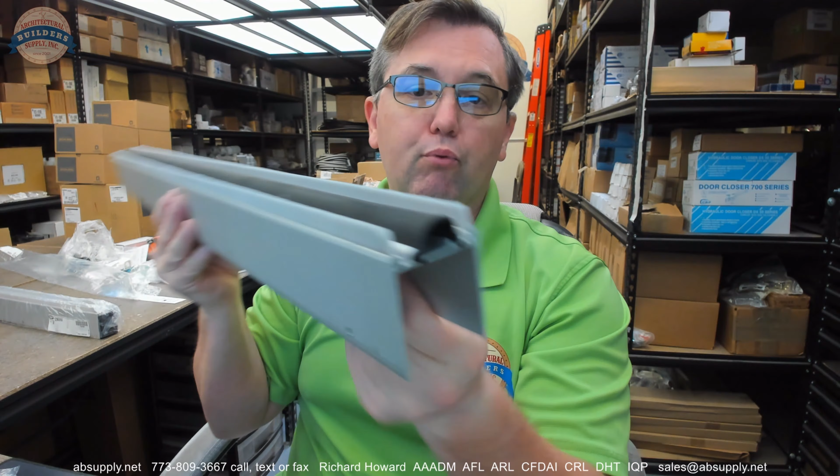This is the 92NWHA, which is going to feature those long sides, but also this somewhat belt and suspenders approach when it comes to sealing the bottom of the door. You're going to have two rows of nylon brush insert. Then you're going to have a piece of neoprene synthetic rubber on the inside. Now, each of these inserts will perform a different role in what they're intended to help mitigate.

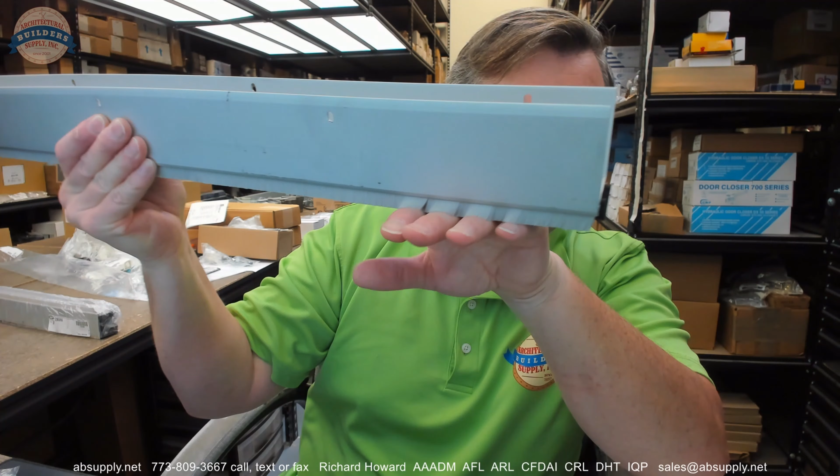So what I mean is, brush is very nice because it absolutely will give you a low closing force when it comes to the door closer, or the closing device if there is one. That's one. Number two, if my fingers were to represent an irregular floor surface, it does a phenomenal job at sealing over an irregular floor surface where that neoprene insert, if I put my fingers there, there's going to be gaps and spaces. Well, you bring your nylon brush, it fills that in really nicely.

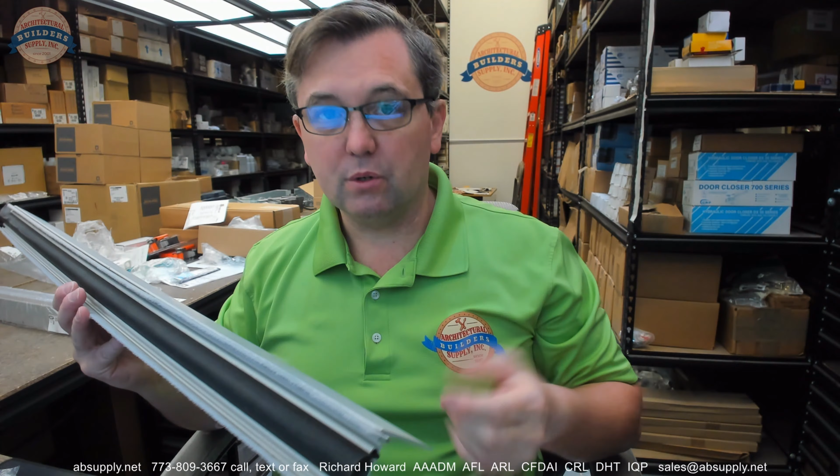So that's number two. Number three, insects, it's known, don't like to land on bristle at all, so it's very effective. Now, maybe less of a thought when it comes to a door bottom, but the concept certainly pertains to astragals and other weather stripping. So it's good in all three of those instances.

Now, this neoprene that's down here, I imagine that this is closed cell neoprene. They call it black neoprene. It doesn't smell like car tire, but it's not the sponge type either, so this would be very effective at sealing for water. Closed cell neoprene is exceptional for that, where it's non-sponge like, really great for water intrusion.

Sponge type neoprene would be very good for thermal, to retard the transmission of thermal energy along with acoustical energy. So this is really a belt and suspenders approach to sealing the door quite effectively. And I'll tell you another reason why people buy these door bottoms with longer, taller sides: they have some damage at the bottom of the door.

Or they're trying to encapsulate a door that's beginning to fatigue, a steel door that's starting to rust, or a wood door that's just starting to really flare out at the bottom because it will be getting time to replace it. I've had people that have mitigated the problem at the bottom of the door: clean it up, sand it evenly, reseal it, maybe try to glue it and clamp it down, put wax paper on top of whatever you're using to have your clamps make contact to, and then to the door.

The wax paper prevents, let's say you're using a piece of 2x4 to clamp down the door to be able to bring it back together a bit. The wax paper will keep the glue, which will seep out and through, from grabbing that 2x4, and then when you unclamp it, you pull the 2x4 off, and now you're taking some of the door with you. So wax paper is a great option. We used to buy it 10 rolls at a time.

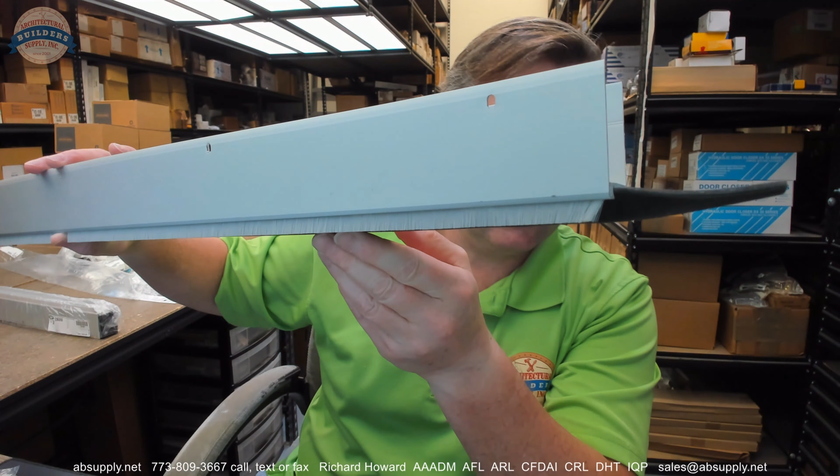Now, this is the A finish, which is a clear anodized aluminum. It's going to be also available in the dark bronze, and it's typical that the neoprene will run long. I just have it basically flush over here for purposes of this video, and you're going to want to get that installed, and then you'll trim it accordingly.

Now you'll see that bristle that's here, I can tug on that a little bit, that's nylon bristle with a steel banding or steel holder. So there's four materials in here: aluminum, steel, neoprene, and nylon.

When you're cutting this, assuming you probably have to cut it, be mindful that there's some steel there. You can cut everything else with a miter box saw, no problem. Your nice 80-tooth, 8-inch diameter miter box saw. You don't want to run that through those little pieces of steel. You want to tug those out and cut them with an end cutter.

And they may be somewhat difficult to slide out, and that's because the factory intentionally crimps the side of these because you don't want the bristle to move. I would think that they should put instructions. The bristle is going to slide out. You do need to crimp that a little bit. I've had people call me and say, hey, that's dented or that's damaged. It's not. They actually peen that down or crimp it to prevent that movement.

And I would recommend that you do that. You get in there and just crimp over the one side of that ever so slightly so that you could reverse it if you ever needed to replace the inserts, which would be possible from the factory.

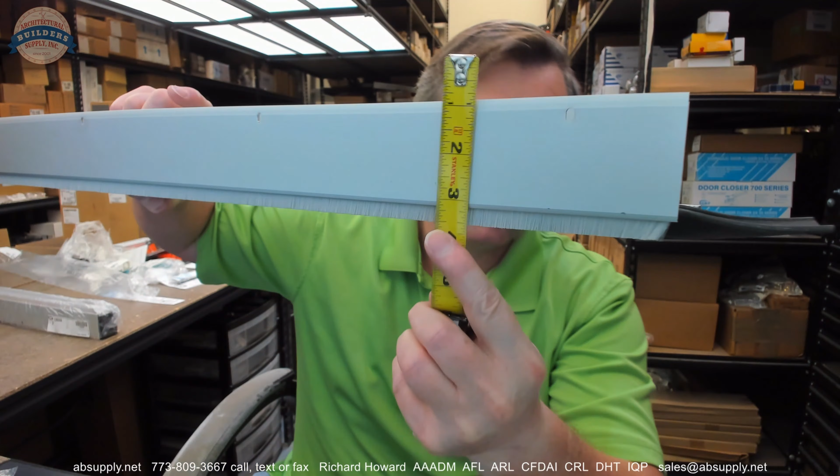Now, some dimensions. There is an image down below that shows the dimensional properties of the item. And it's every bit of a 1/2 inch or 3/4 inch taller than standard in terms of the face. That face is 2 inch. What they're really saying here, the dimension is 2 inch from where the bottom of the door will reside. That's the 2 inch part. So the overall face that you're going to see is going to be beyond that, about 2 1/4, as you can tell. Down to the bottom of the insert is going to be about 2 1/2, 2 5/8.

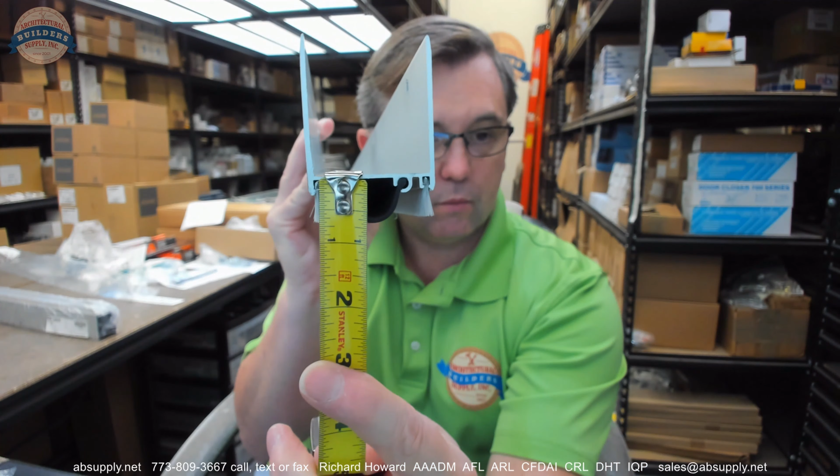Okay, so the important part is from the bottom of the door to the bottom of the neoprene. Looks like it's just heavy on 5/8. Sorry. Yeah, 11/16. So, what should your undercut be? No tighter than 5/8, I would think. Any tighter than that, the neoprene's really going to start to crimple, if that's a word, fold over unnaturally. The bristle will tolerate that a little bit better, but you don't want to have a substantial amount of resistance to the door closing. Let's say you had an undercut of 3/4 inch.

Okay, maybe just tug this down a little bit. And you'll notice these screws are here at a stagger pattern, and that's, of course, normal. You don't want the screws, which are included, to bump into each other. They've included self-drilling screws with this. I can't say that that's standard across the board, and I would guess that it is not, but that's what the factory put in with this unit. So there you go. There is some supporting documentation down below, so let's switch to that right now and take a look.

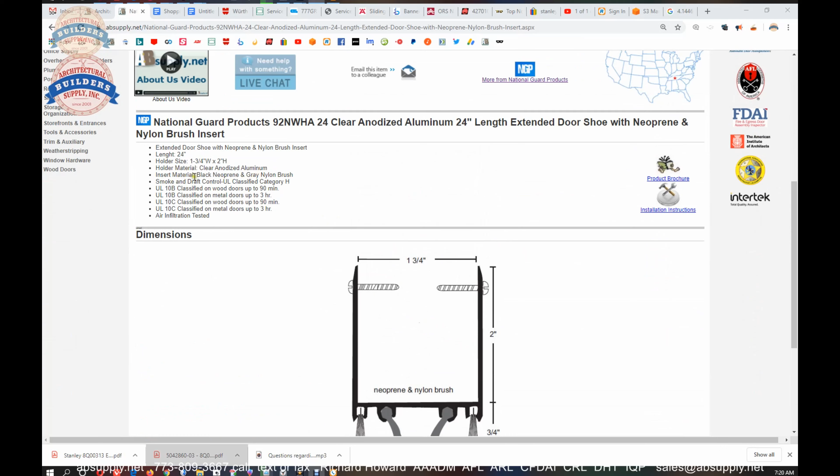Okay, so this is the item that we're looking at here. Dimensional properties, nylon, neoprene and nylon brush. Fire rated up to 3 hour. Black neoprene and gray brush. Smoke and draft control. Okay, product brochure is here. This is where you'll see a smattering of different extended length door bottoms.

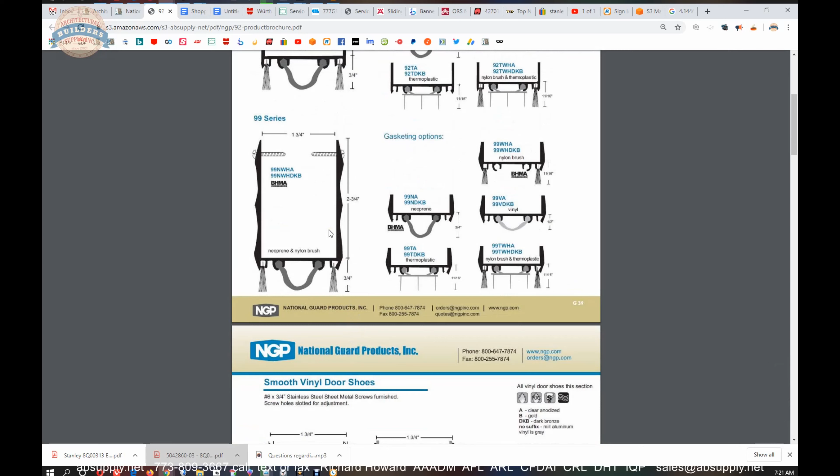Sometimes people will like this beveled sort of face. It perhaps may be more attractive, maybe more appropriate for a residential application, I suppose. A bit excessive, I would think, for just a hollow metal door on the back of a strip mall. However, it's there if you like that sort of look in the design. Other door bottoms are here, a variety of them, as mentioned earlier.

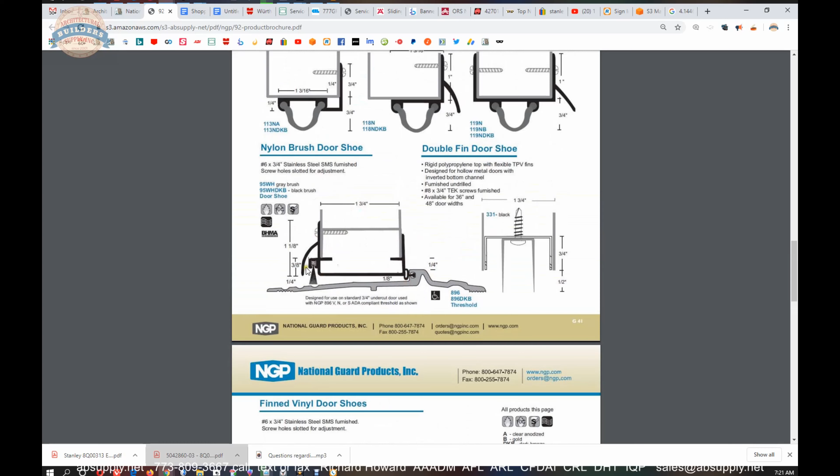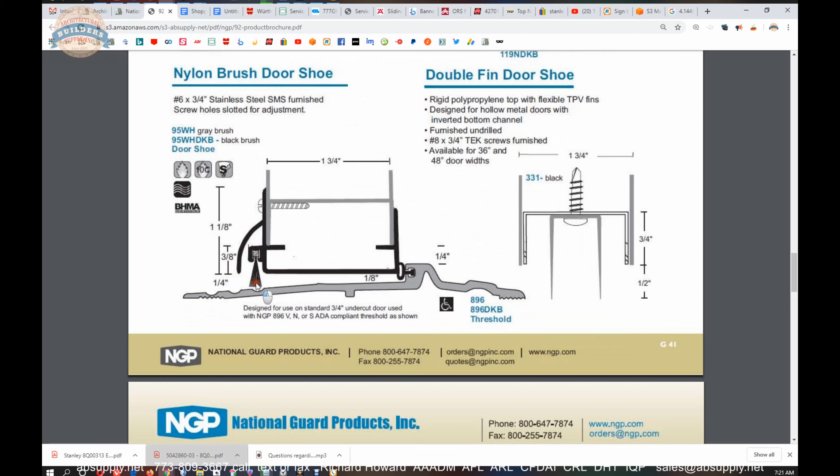This is a neat sort of concept when you're using it with a bump-up threshold, that you're going to be able to seal over here, which is what you like, but I want my line of defense out in front of the door as much as possible, and then that integrated drip cap is very effective at just simply helping run water away from the point of intrusion. More U-shaped door bottoms, etc. Okay.

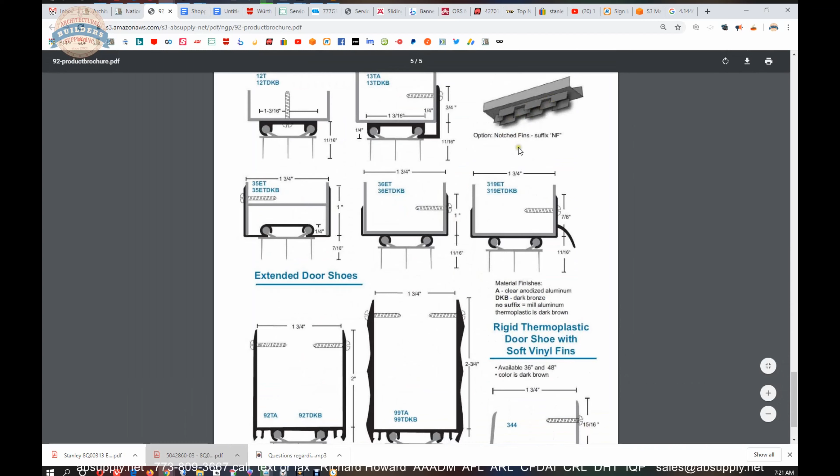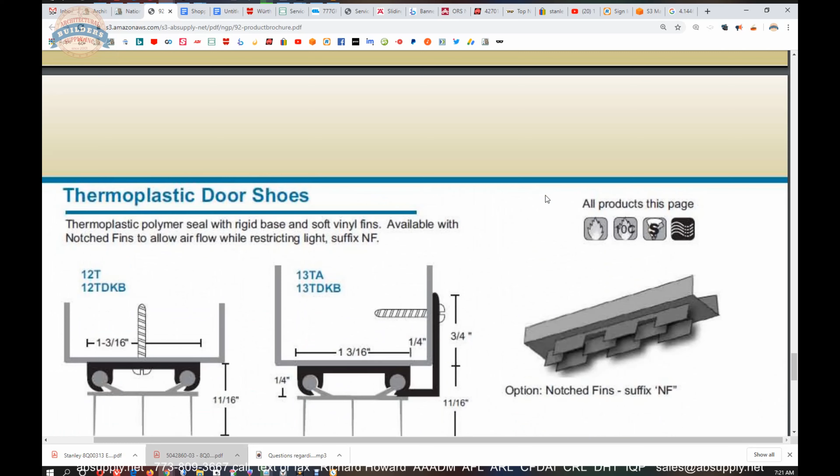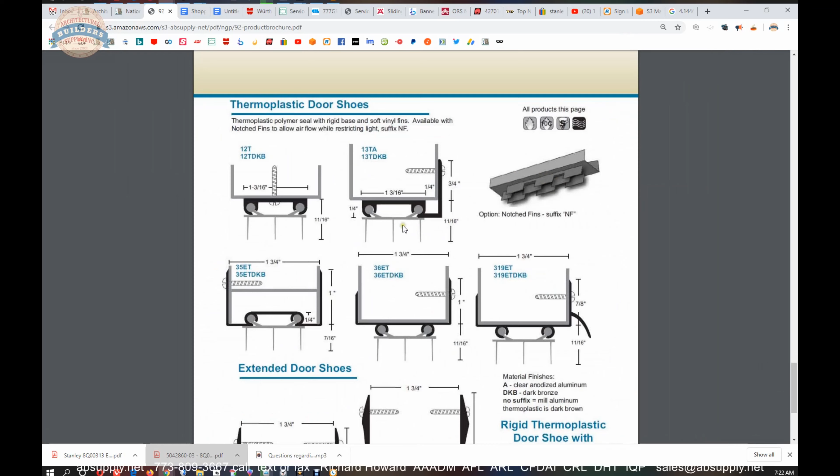You can do notched fins on some of these door bottoms, notching this. You might say, well, why in the world would I want to cut notches in my seal? You wouldn't if it's a residential door or an exterior door and you're trying to keep out the elements. If it was a hotel room and you have to have a door bottom on those, you want a source of fresh air for your air handler, and that's why they would notch those. Okay, no daylight would really come through at all, obviously. Very handy product brochure showing you other options. A is the clear anodized finish.

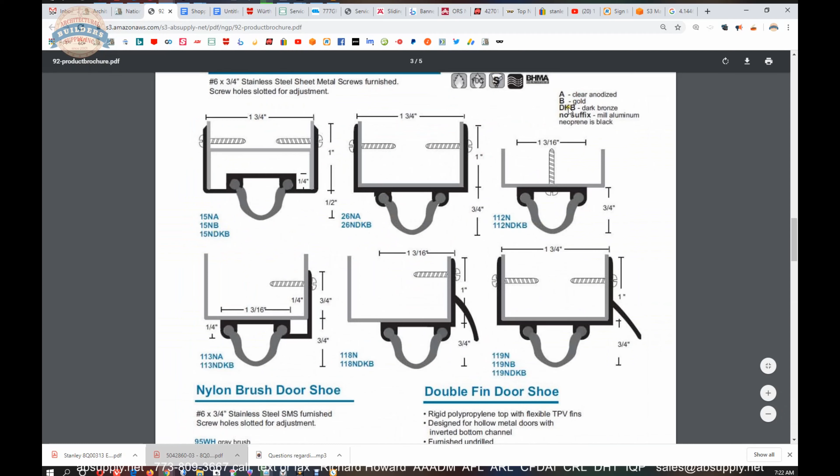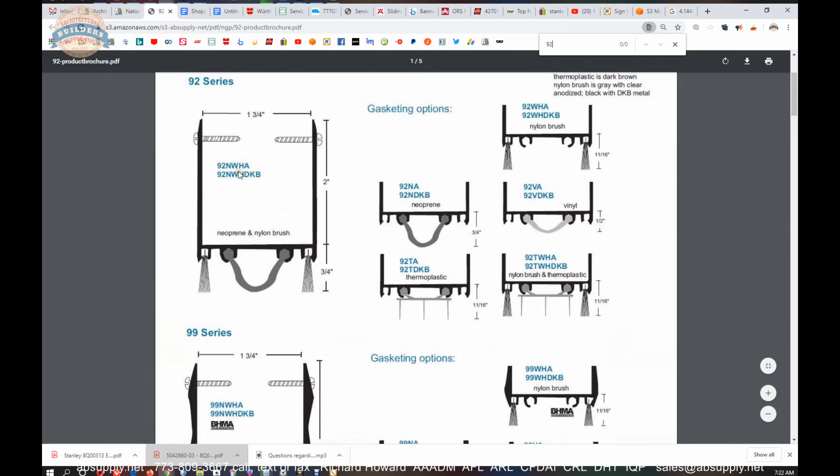If you see the letter B, that's going to be for a gold anodized finish, and then DKB would be a dark bronze anodized. The 92N, this is not, here we go. So the 92 NWH is available in clear anodized and then dark bronze anodized as well.

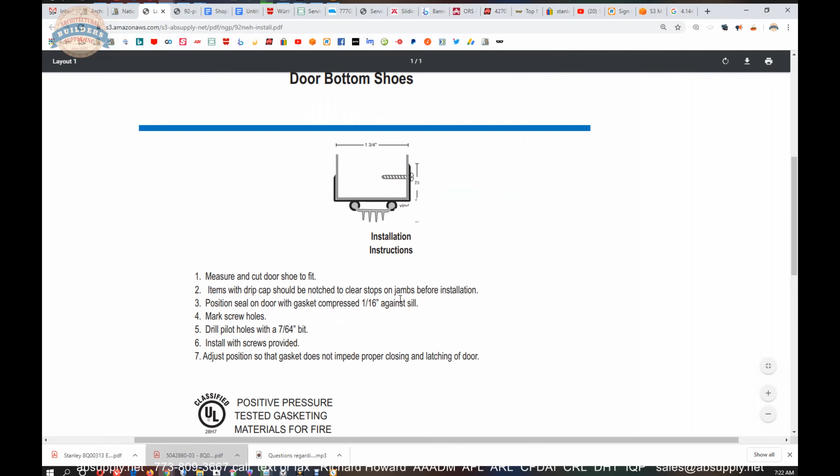Now, the installation instructions are also linked here. And there's not a whole lot to say about this. Measure, cut to length, pre-drill your holes, attach, have at it, just typical stuff. Position seal on door with gasket compressed a 1/16 against the sill, and that's where I'm coming up with. If that was 11/16, I'm saying that your gap shouldn't be any tighter. Your undercut shouldn't be any less than 5/8.

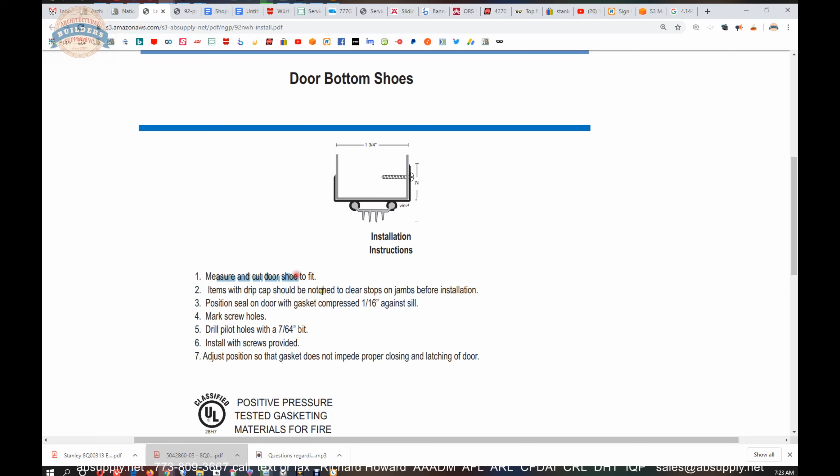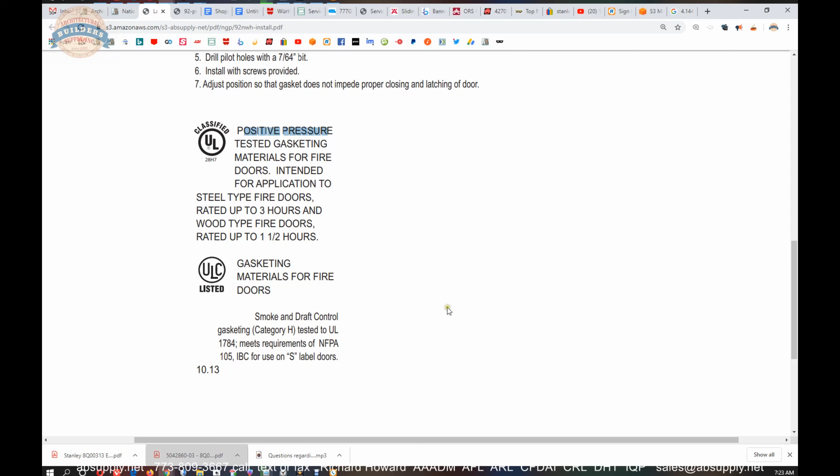7/64 hole to pre-drill those screws. Measure and cut to length. We're going to talk more about that in a moment. This is positive pressure rated. This does not carry any visual evidence of it being fire rated, but there is paperwork on file. So if you were doing a project where the inspector requested supporting documentation attesting to the listed and labeled nature, or at least the listed nature of the product, National Guard would most certainly produce that for you.

Now, there's a link here to the manufacturer's page, and that page is going to allow us to review not only all of the National Guard products that we sell, but also a link to the manufacturer's website, as well as a link to the full product catalog. We also have a link to their Flood Shield catalog here, which is interesting.

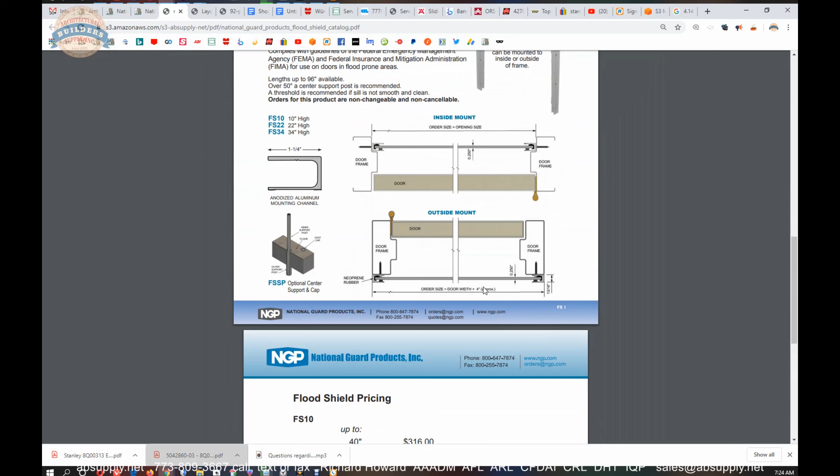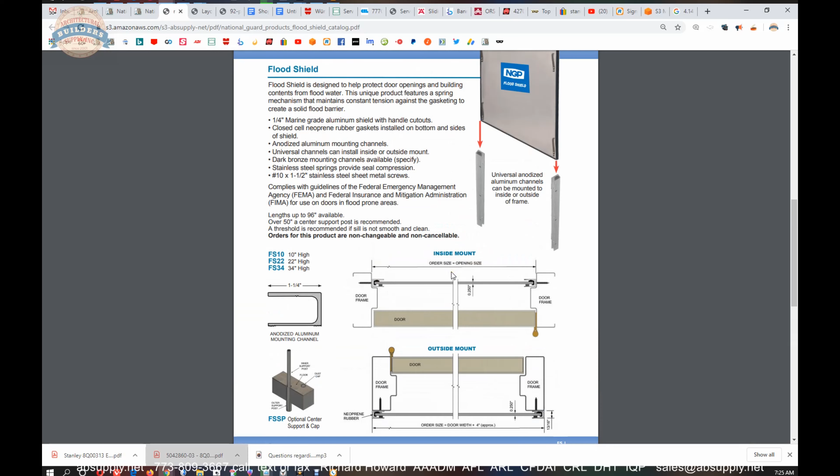A relatively new line of basically aluminum plate that you drop into some, well, let's just take a look at it. Aluminum plate that you drop into side mounting bars in front of doors, maybe windows, and is obviously meant to help mitigate the gross intrusion of water all at once. I wouldn't say that these are waterproof, but they're not useless. We don't sell very many of them, but we do occasionally get requests and orders for the material because they would like to have something in front of the door in this weird, unpredictable world of weather patterns that we live in. So that's handy.

The A117.1 is the Federal Published Accessible and Usable Buildings and Facilities Guidelines. Why have this here? Well, National Guard makes weather stripping, specifically thresholds, and this is the governing document as it pertains to how tall a threshold can be at a handicap opening. Everything is here for that. The height, the slope, a very handy document, which is why I have it there.

NGP has gotten lately into sliding door hardware as well, and they also have vision frames, louvers, glass, things of that nature. If you know the name National Guard at all, you most likely do just because of their weather stripping. Let's switch back to the camera view and conclude this video. And indeed, their name is ubiquitous in the industry for weather stripping. So whether you're a detailer, an estimator, an architect, an end user, a distributor, a contractor, the name National Guard is probably going to be familiar to you, and you'll probably find universal acceptance of it.

Now, this product you can order in any length. We have these listed on the website from 2-foot to 8-foot lengths. You can order any size that you want. You might need to reach out to us to order the size. If you needed 12 feet of this, you'll have to, at this time at least, reach out to us and we'll enter the order for you. Lengths longer than 7 foot are costly to ship.